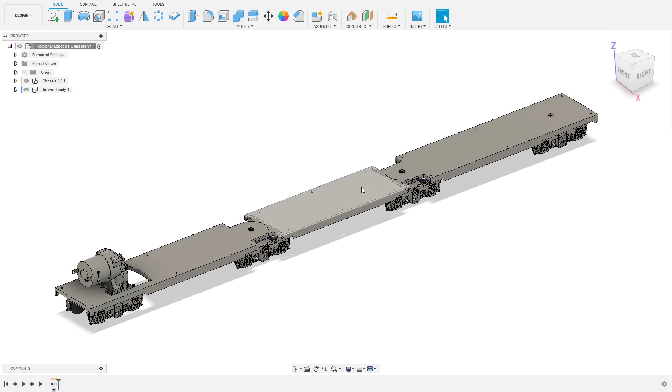So this chassis is inspired by trams, and the unique feature of a tram is that it's usually built to be able to cope with very narrow track radius and very tight turns. So what it means is that, for example, bogies can be placed in the center of the rotation points like I've done here, or they also often have the bogies mounted only on the center car and you have outer bogies like this. So it reduces the number of bogies compared to long distance trains where you have long cars with 2 bogies on each car.

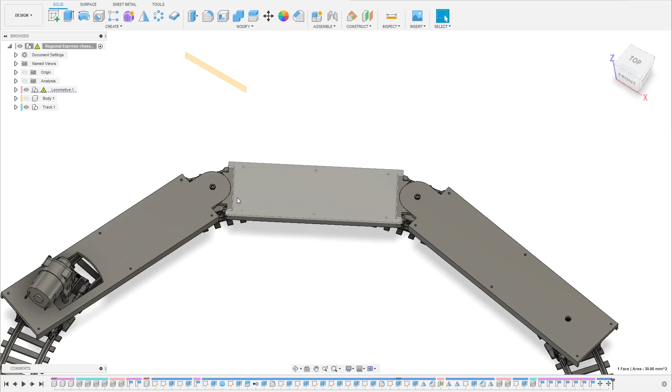And what this does is that when you have narrow track or tight track radiuses like we have here, you don't get a lot of sideways movement between the cars when you go through switches and stuff like that, which makes it really hard to do something scale-like. And of course, it will also reduce the number of parts you need to print, and it will also reduce the assembly time because you have fewer bogies to work with.

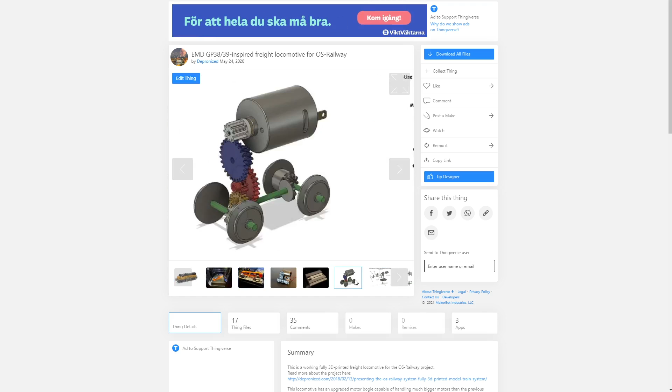I will also include links to other useful things you need to know about this, because this is based on, for example, the GP38 locomotive that I have on Thingiverse. So it's the same motorized bogie, which incorporates a 3D printed gearbox and is also adapted for a 380 size electric motor. So you can buy a cheap 28mm diameter RC motor, which is available on eBay and other vendors as well.

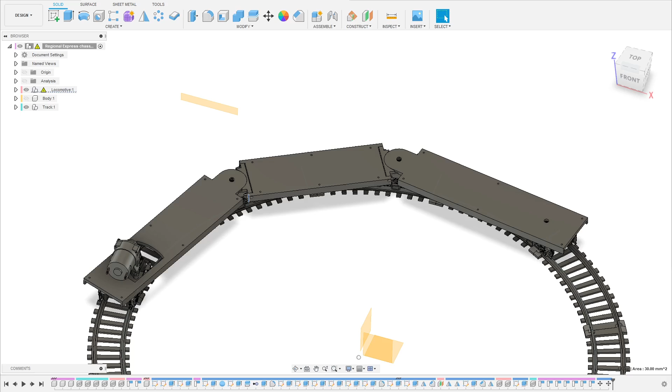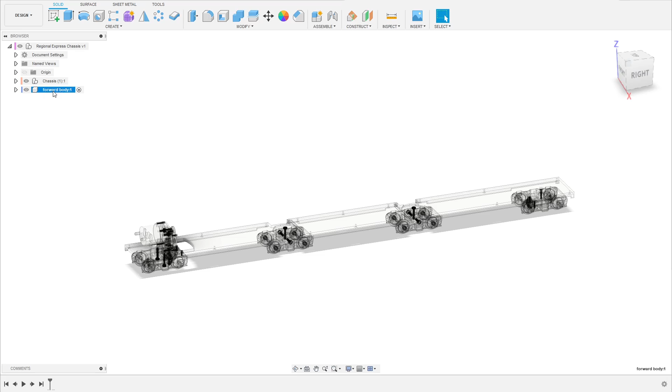So in this video I will show you how to make a super simple body for this. So before we get started, I always recommend that you create components and try to divide projects into several components, which makes it a lot easier to keep track of what you're doing. So in this case I have created a component that is called forward body.

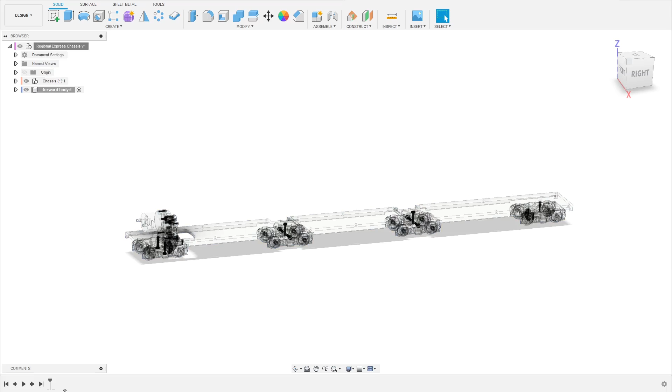And also one thing that is important to keep in mind is that when you import CAD files into Fusion 360, if it's not a Fusion project you're importing, your history timeline below will not be activated by default. So that can be really annoying, if you start working with something, you create lots of drawings and lots of features and you want to go back in the history and suddenly you notice that the history is not there. It's because it's not turned on, so you need to right click and click capture design history. So in this case I have already done that, so my history is active down here.

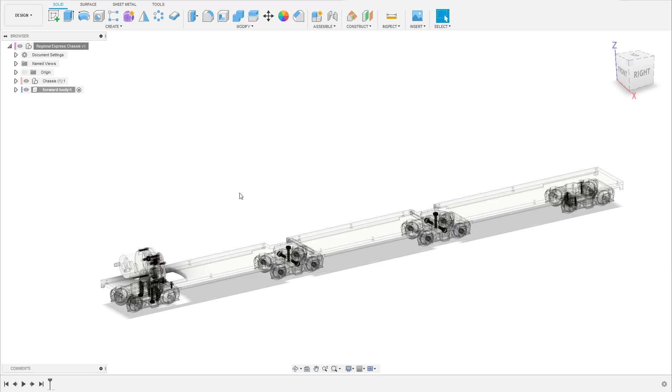So let's get started. You could approach this in several different ways. As always with CAD, there's always many different ways of doing things. So you can either start by making a side sketch of the profile of the train, or, if you want, you could start with creating a front profile of the train. It's a matter of taste and also what kind of blueprints and drawings you have. So in this case I will start with a side sketch, because I personally think it's simpler to get an idea of how the train is going to look when I draw it from the side first.

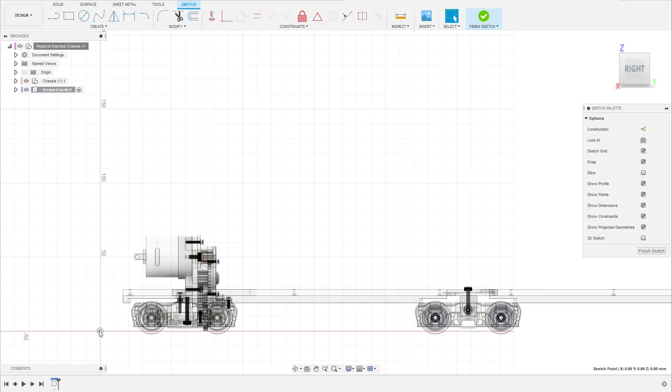So what are the dimensions to keep in mind here? First of all, it's where the track comes, and I placed this in the CAD so that the origin is right at where the top of the track is. So obviously we want some clearance from that, so maybe between 5 and 10 millimeters of clearance at least. If you're not building any bridges or slopes or anything, you could go even closer if you want to, but I recommend that you at least keep some clearance there.

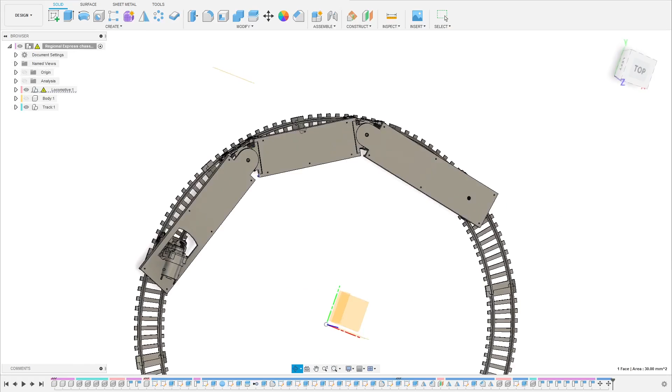And the other thing to keep in mind is that we don't want our body to extend too far, too close to the rotation point, because then the side bodies and the center body are going to collide when you go through a tight turn. And we can use this, which I called turn analysis, to show how this actually works.

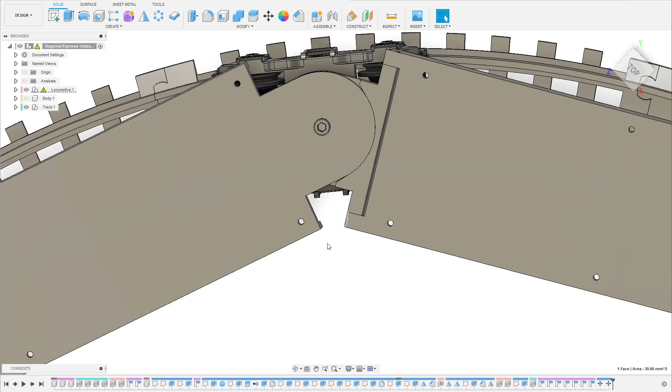And what you can see here is that this is the narrowest turn radius that I have, and I've made it so that you could extend the body a little bit out from the chassis on the sides and it'll still not collide. So you have at least 4 or 5 millimeters that you could extend the body on the sides of the chassis, and we're actually going to do that in this case. So the body doesn't have to be placed only above the chassis, it can also go along the sides.

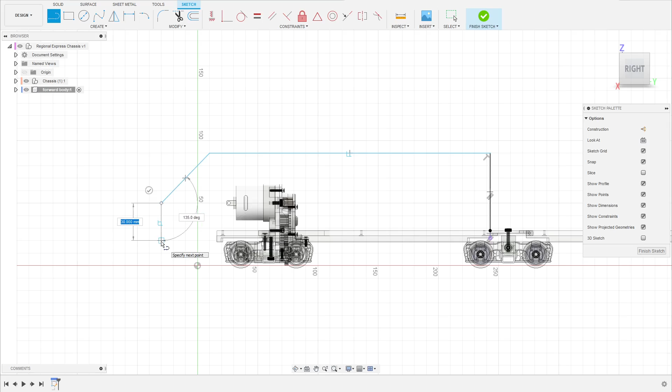So let's get started, and we will use the end here as a reference. So click P for project, and we can click the edge here, and that is a good reference point to start with, and we will create a sketch from there. And now I'm just improvising something here. And I'm not using rounded edges here, and you will see in a moment why I'm not doing that. I understand that this looks a bit weird, but there is actually a reason for this.

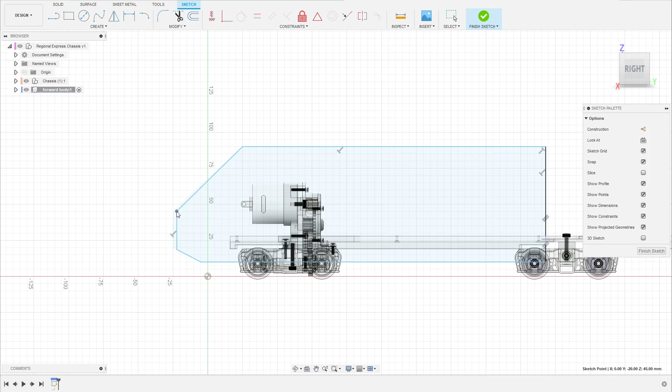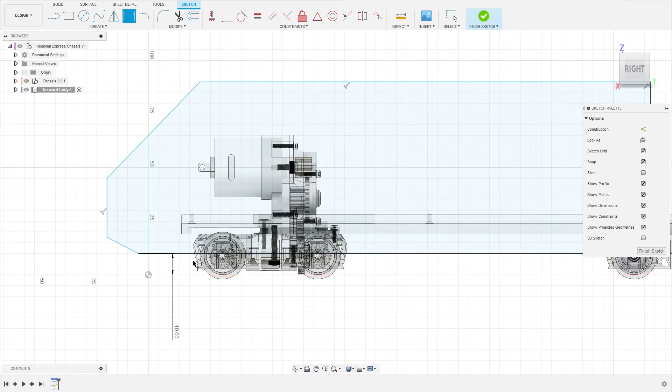So I will try to imagine now, when these points here are rounded, how the shape is going to look. So let's do something like that to start with. And it's of course possible to go back and change this later, so we don't have to put too much time here right now. So let's put in some dimensional constraints. So we have 10 millimeter clearance to the track, and also the overall height 80 millimeter.

So let's finish this sketch, and what we can do now is go ahead and extrude this, and we choose symmetrical. And that means when we draw here, it will do the same thing on the other side. And you can see now that the chassis is 60 millimeter wide, so we have 30 millimeter on each side, and we will extrude a bit further so our body can go further down on the sides, on the outside of the chassis. So let's add 2 extra millimeter there.

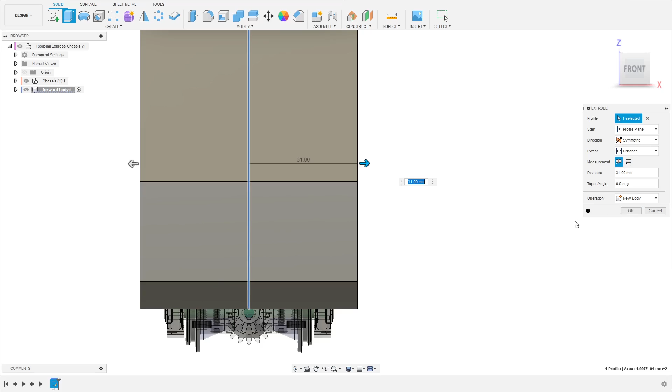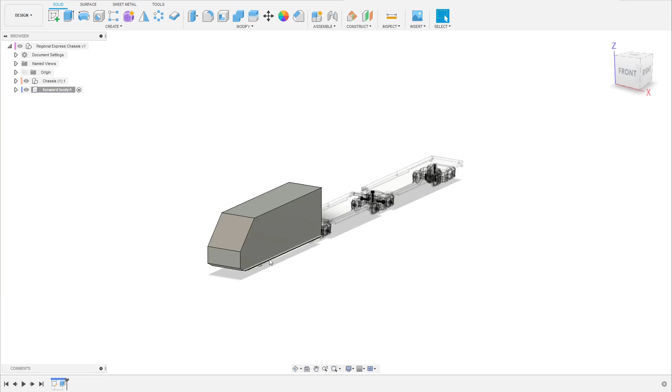And make sure also that it's trying to create a new body, so that it doesn't want to cut or do anything else. We want to make a new body. So this looks really weird, and now I'm going to explain to you why we did these sharp edges here. Because what I've seen is when you do a really simple body like this, one of the reasons that it doesn't look scale-like is when you have a flat side that is the same width the whole way up. So what we want is a narrower part up here, and we also want the body to be a bit narrower down here. That will make it look a lot more scale-like.

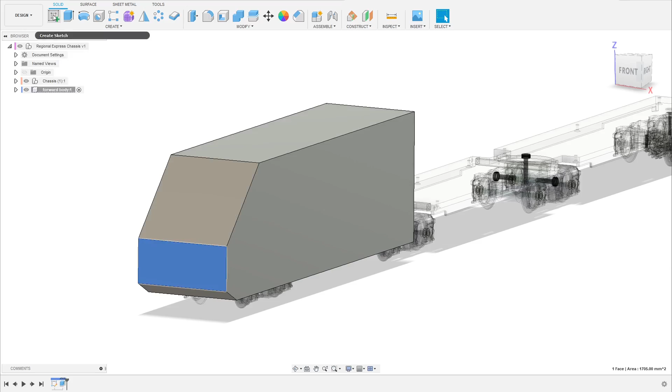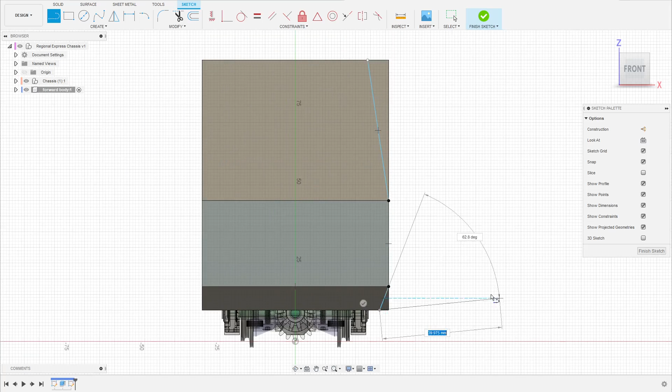So to be able to use simple tools in the CAD, we will use these edges all the way around, and I will show you how to do that. So click on the front and click a new sketch, and what you see now is we can actually use these edges here. And we will make the body narrower in the roof, and we will also make it narrower down here. So let's close these.

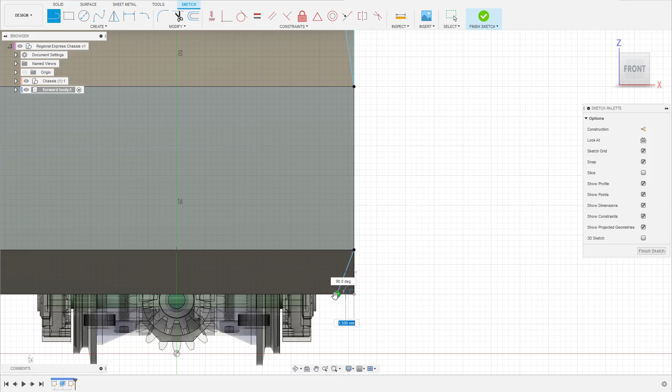You can see that the area turns blue when it's possible to create an extrude from it. Now we're only making one side because we can mirror the feature later. So click Finish Sketch, and you can either mark the two areas first and click Extrude, or you can do it the opposite order. It doesn't matter.

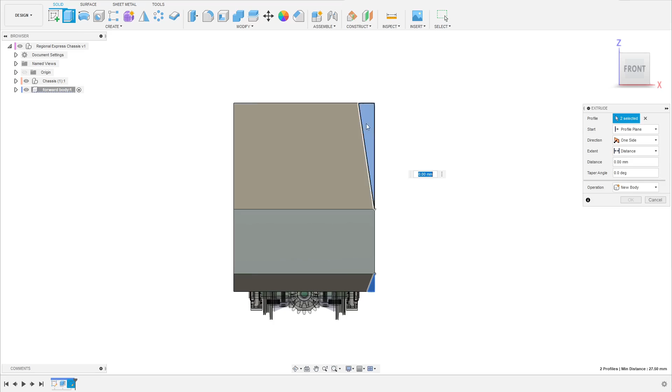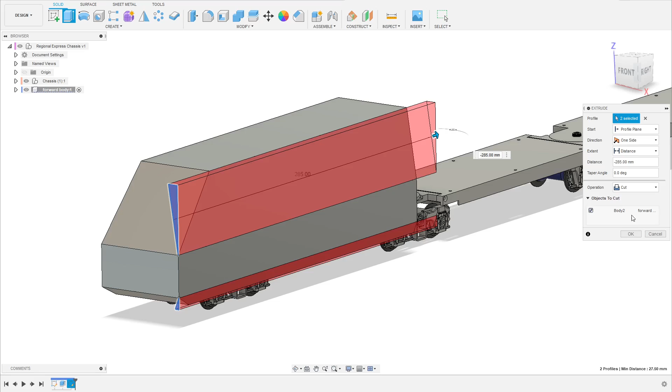But what we're going to do now is that we're going to remove material. And when you do this, if you're removing one area where there's part of the chassis and part of the bogie there, it might try to remove material from that as well. So what you can do here, you can click on the objects to cut, and you can make sure that it's only trying to cut the body that you're working with. And we can see that it's only doing that, so we click OK.

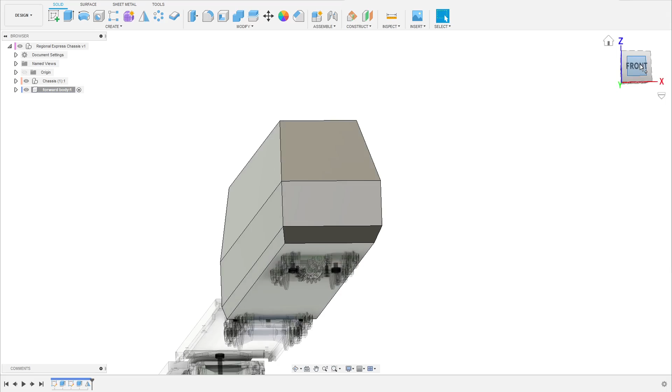And now we're going to make sure that it does it on both sides, so we can mark the feature and we can click Mirror. So the feature is already selected, so we will select the plane, and it can be a little bit hard to find it, but let's see. Now it's probably visible that I'm clicking the center plane here, and click OK. So now if we look from the forward side, we can see that the roof is a bit narrower, and also the bottom here.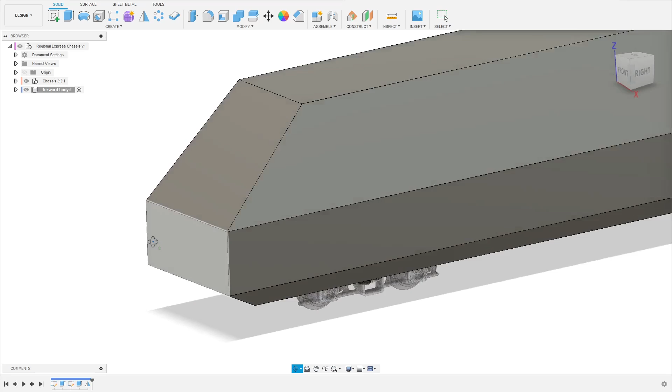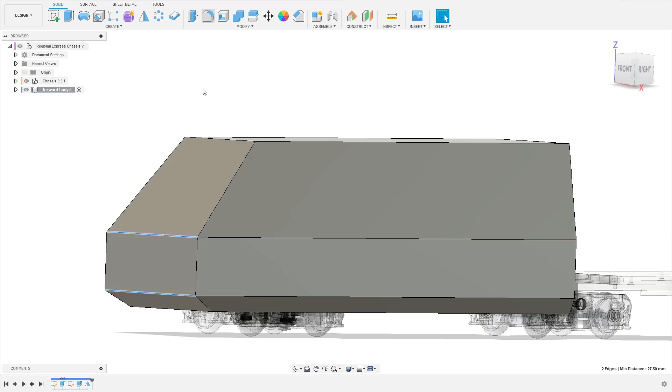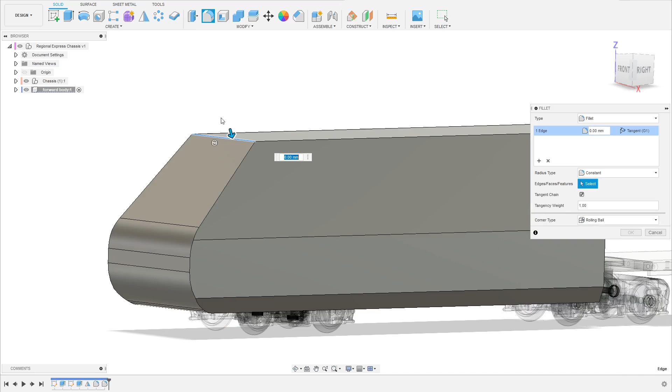So now we're gonna try to round these features off. So let's see in which order we want to do that. Now this might take a couple of tries, because you can do this in different orders, and that will create entirely different results. If we, for example, start with these and press fillet, and this one, oh, that was a bit too much, and we take this one, I can see it already starts looking a bit more like a train. And what this does is that you can see now that we're maintaining this line here.

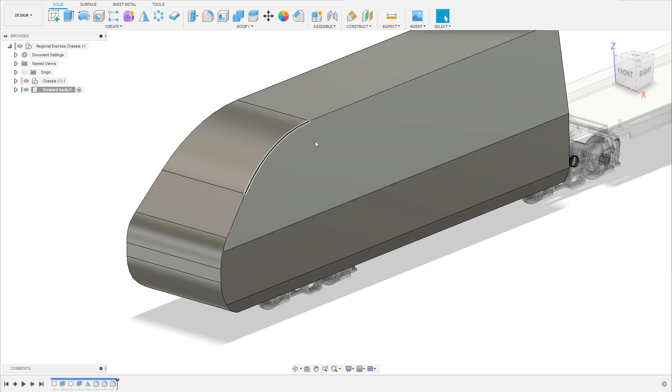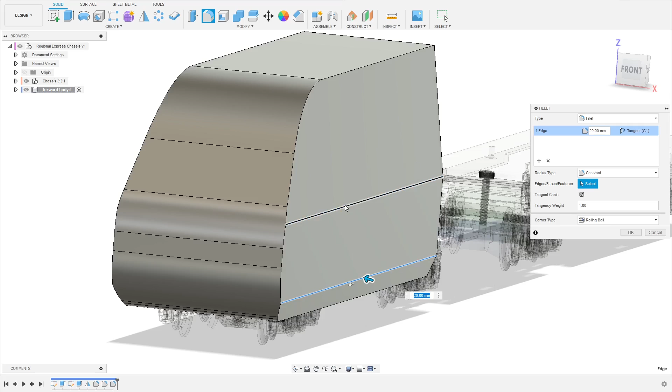So let's go ahead and round these off too. Now this might be very hard to manually pull this to a good result, so it might be easier to just enter some values and see what happens. And as you can see, these are so different, so I think we're gonna go ahead and do them individually instead. So for this one, 20 seems to be okay, and for this one we want a higher value. Oh, not 450. Something like that.

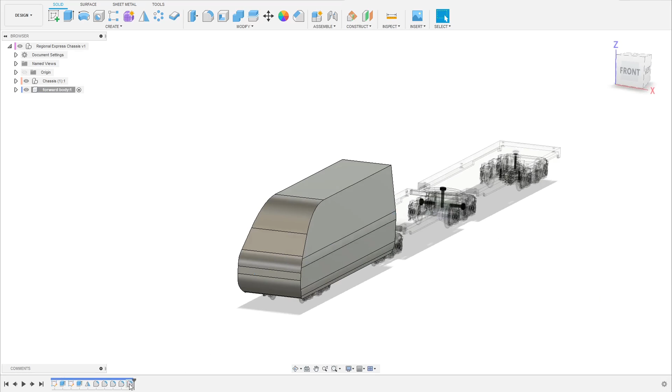Now, what you could do, because you obviously want to have this on the other side as well, you can go back to the history and you can double click on a feature, and you can hold in Control and you can select one more edge and click OK. And for the upper one, we also want it to affect the other one as well on the other side. So there.

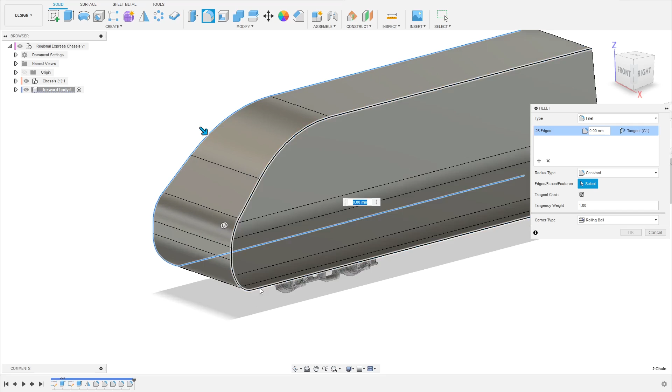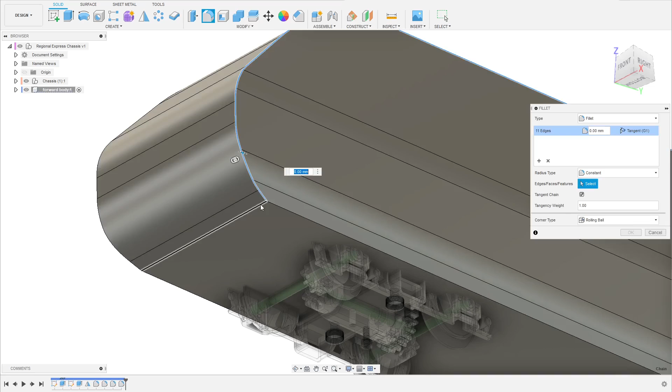So let's now try to round these off. Now you see that it's also trying to round this lower edge off, but we don't want that. So what we could do then is we could actually remove this one, because now when we click fillet, it will stop here at the sharp edge. So let's try some values here and see what happens.

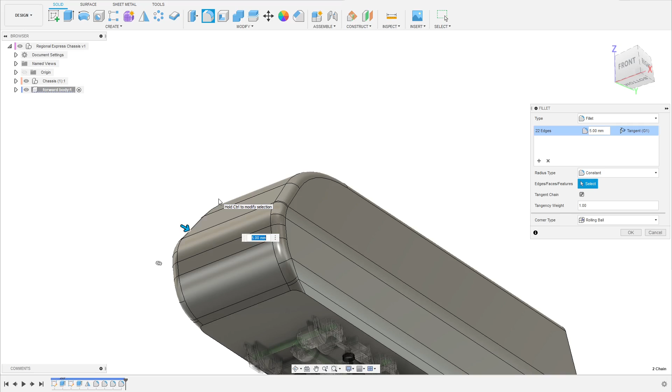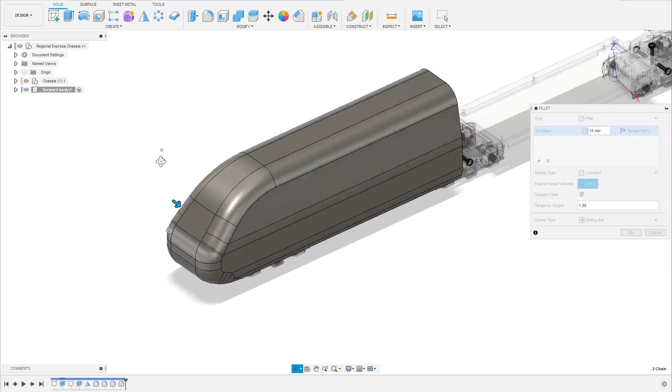Now, as you could see, it was really hard to pull the arrow there because we got an error message quite rapidly, but it was a lot easier to just enter some values and see what happens. You can also try here to see how big values you can enter. Okay, 20 was too much, so 18, 19, 19 is probably around the biggest radius we could use.

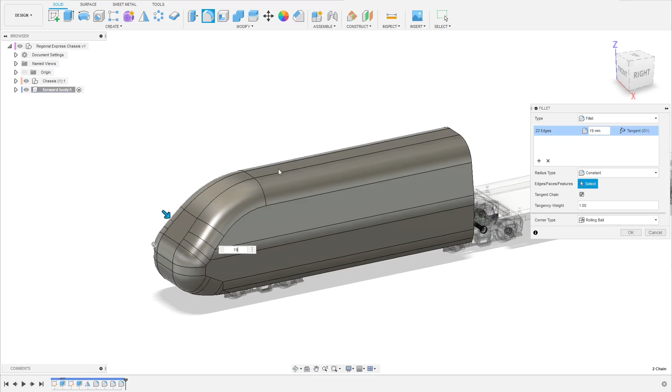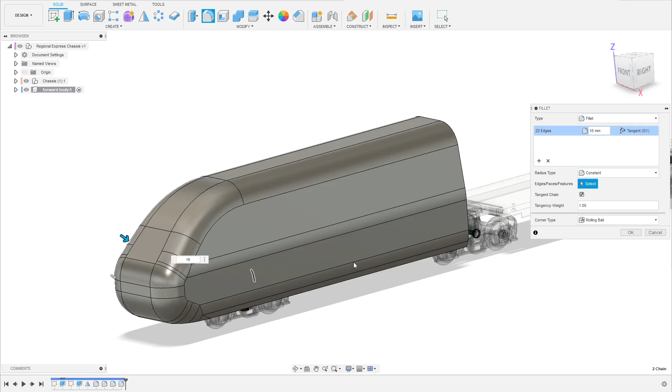I think that might be a bit too much. So let's try 16. Yeah, that could work. I'm going to show you a different method here, because if you think like I'm thinking now that the nose section here, or what you would call it, looks a bit too wide. I want it to be narrower.

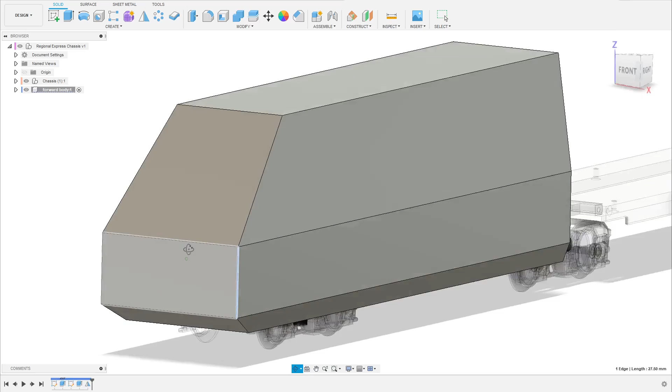So I'm gonna show you now an alternative path. So I'm actually going to remove all these rounds, all these fillets, and I'm going to show you a different method. So what I'm going to do now is I'm going to make this narrower before we start to round off all these edges. And there's several ways we could do this. We could do it with a sketch, and we could remove material, but we could also use the chamfer tool.

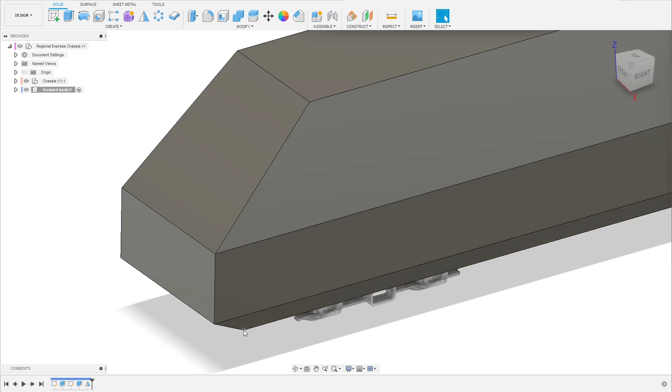And before I do that, I want it to align with this point here, so I'm going to check my sketch, and I'm actually going to put in some dimensions. I want to know, for example, how far back this edge is. Okay, it's 15 millimeters. And I want to know how far back this point is. Okay, 45 millimeters.

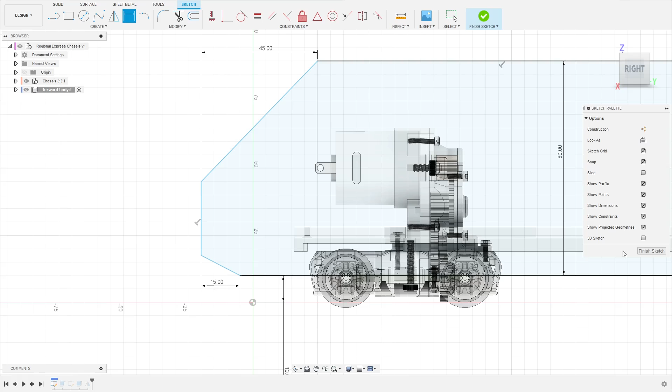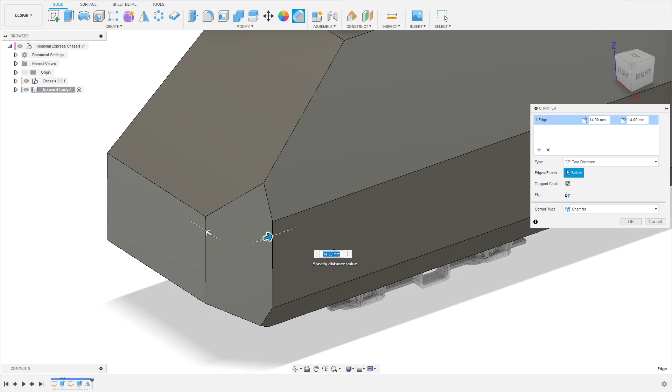So let's use the chamfer tool and try some things here. We want to use two distances, and we know one of them is 15 millimeters, but that actually did not work, as you can see, because we already introduced an angle here. So let's see what we can do about that.

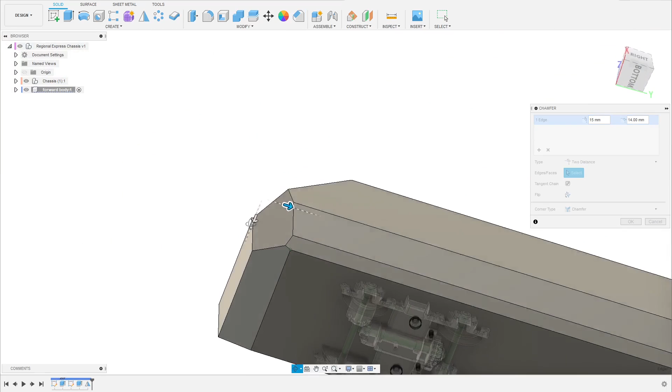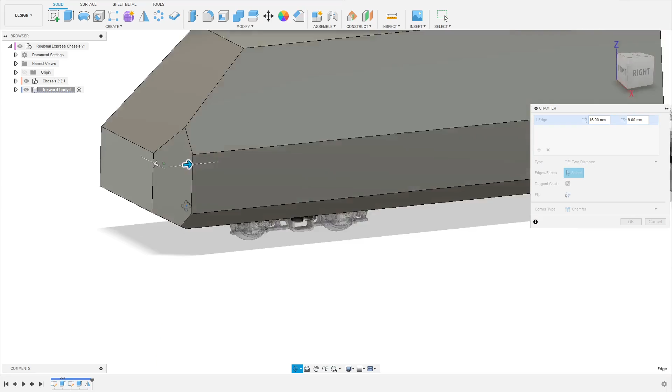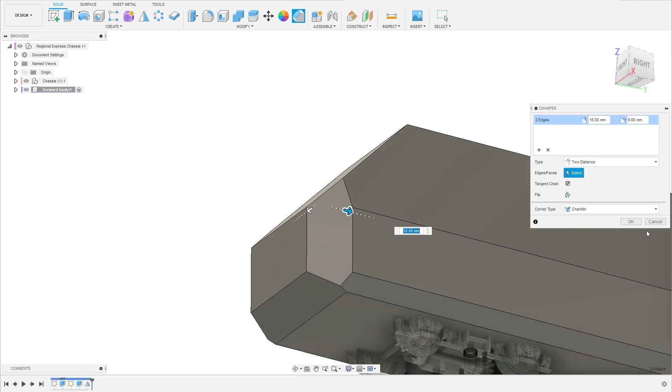Let's try to bring this a bit further back. See what happens. This is a matter of trial and error, and you can try many different values and see what you think looks the best. I will try this and see how it works.

So again, we need to think about in what order we want to round this off. I still want these lines to be one quite big rounded edge. So I need to make sure that Fusion recognizes this. So I'm going to, as we did last time, start with these two edges. And next is this one.

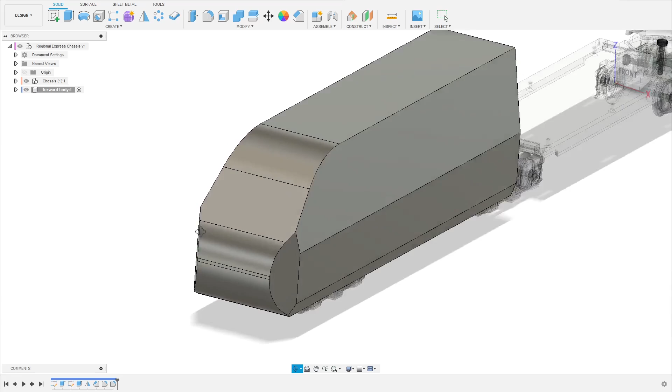And now we introduced some more edges. So if I click here and I click fillet, Fusion will think that this edge is actually broken here. So what I'm gonna do is create a fillet here as well.

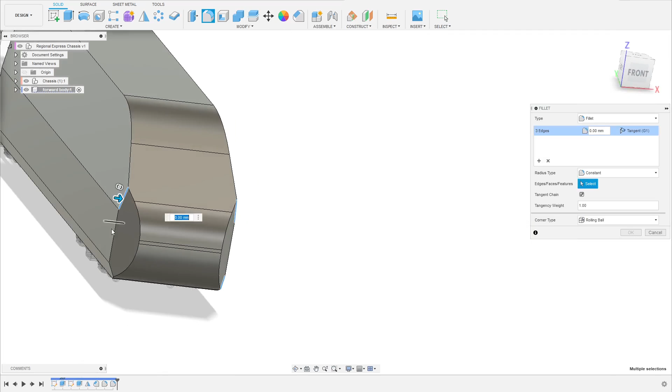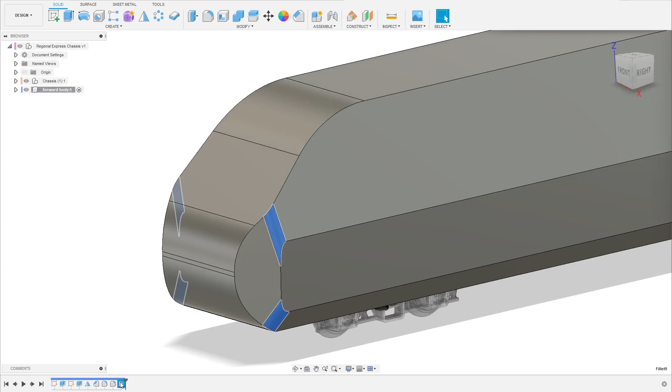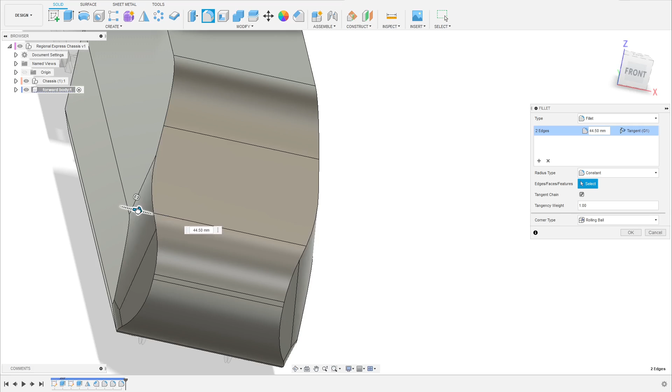Now I see that I could actually make these with different dimensions, so I'm gonna do separate fillets for these. For the lower ones, I want to keep this small value, but for the upper ones, I want to have a bigger value and see what that looks like. I think this will actually make a much better look.

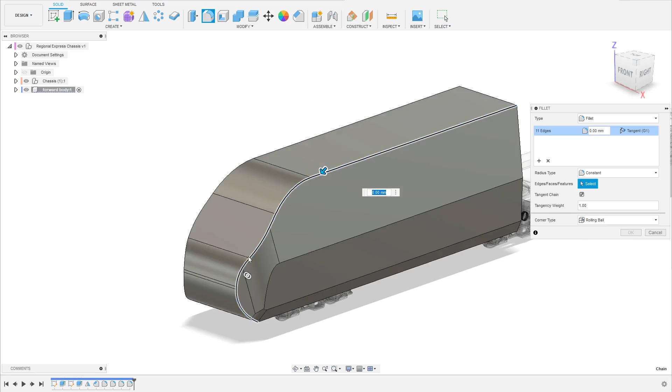What happens now when I press fillet or F? You can see now that Fusion recognizes that this is one long edge that we can make a fillet on. So let's try some values. Now we have a much more complex geometry, so this might get us into trouble, and we can see that it does. So let's see what we can do about that.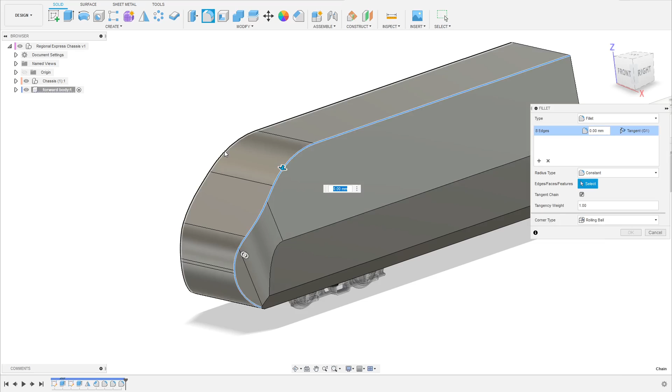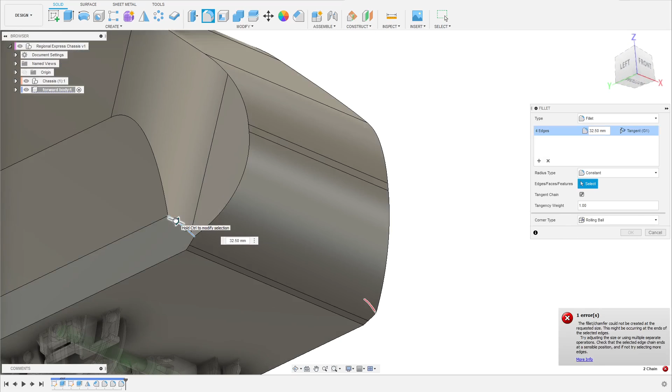Let's go ahead and remove the lower fillet here and see what happens. No, it didn't like that. Let's try with a bigger value there and see if this works better.

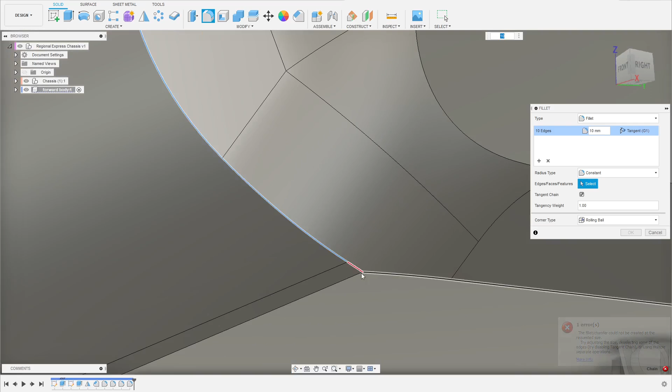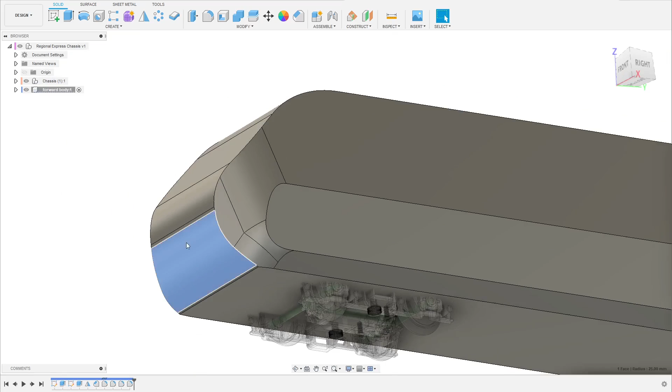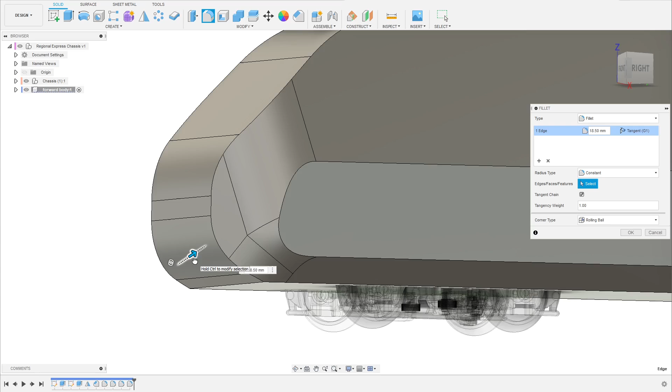So it's this small edge here that is causing trouble. I'm gonna see if I can get a better result if I make this radius here a bit smaller. So let's make these two with different radiuses and see what happens. No, still doesn't want to cooperate.

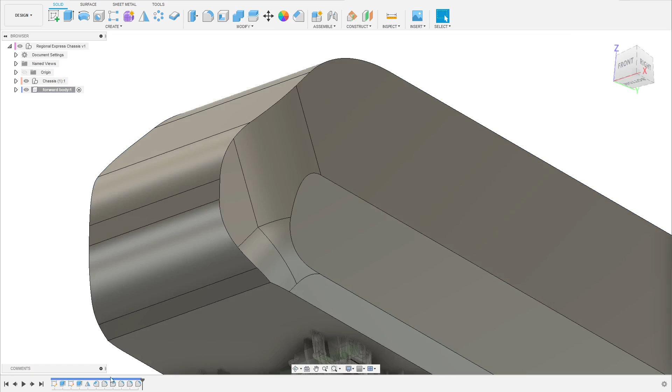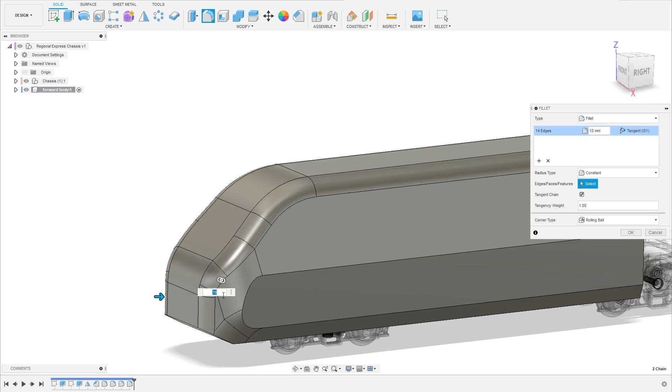So let's try another method. We completely remove the fillet down there and we concentrate on this upper edge. That worked.

As you can see, the more features you introduce, the more trouble you get. So yeah, try to keep things simple to start with. You will have a lot less trouble. So we could do like that. And now let's try to make a separate fillet down here and see what happens.

That's interesting. I'm surprised that worked. Yeah, that worked surprisingly.

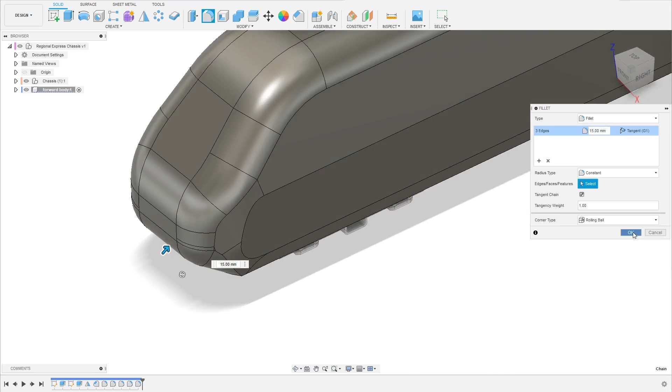Now you could actually keep this sharp line here as a feature, or we can go ahead and put a fillet on it. That's a matter of taste, I guess.

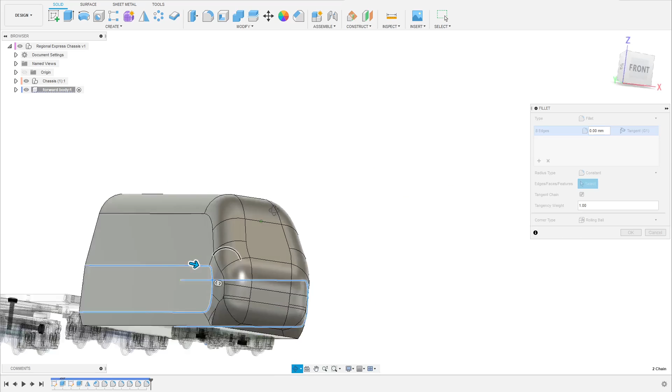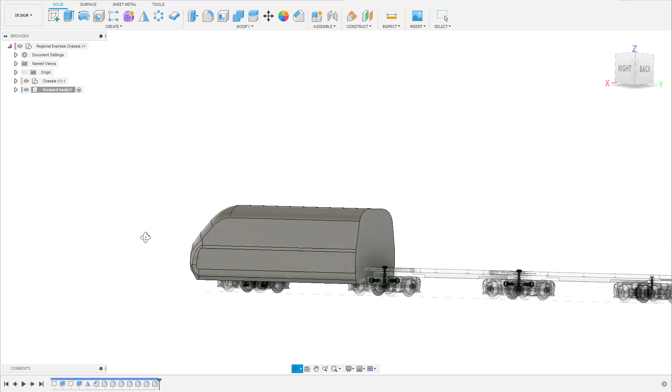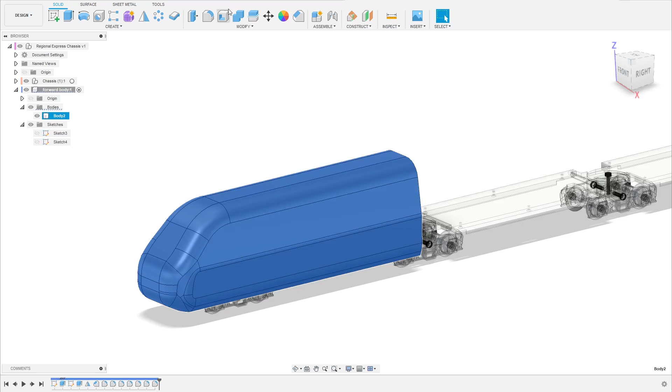So now let's not put any more time into the shape of this one. Let's assume we're happy with the result. Now there are different ways that we can make this a shell, and I'm going to show you at least one of them that I like to use. And I try to use the shell command when possible, but if you have too crazy of geometries, you sometimes end up with situations where this tool cannot actually calculate the things right.

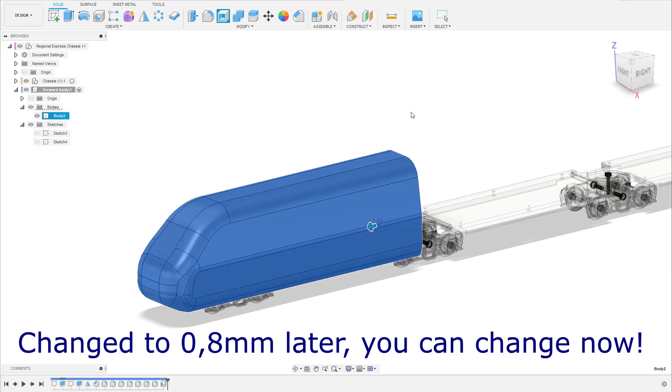That might make it really difficult. But in this case, I hope that we can use it. Yeah, we could. There's no errors. So in this case, I made it 1 millimeter thick.

I think that's a good size. If you're gonna print with FDM, then 1 millimeter is actually quite good. It usually works and it doesn't get too heavy, and we can add features and reinforcements inside if we want to.